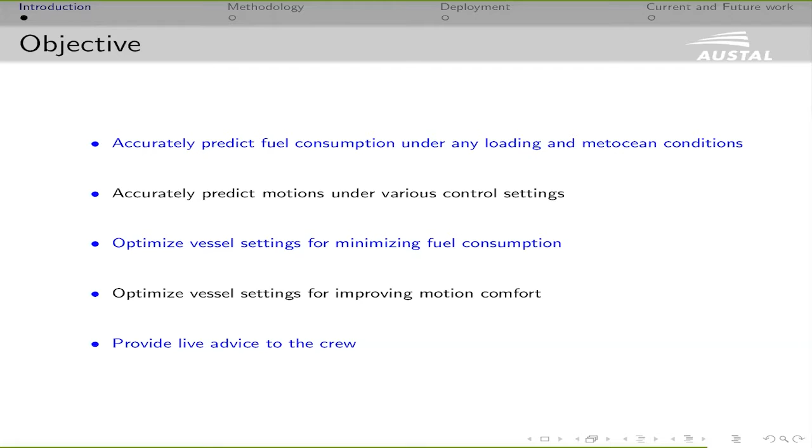The parts highlighted in blue are the ones that I'm going to talk about in this presentation, and the one in black is not a part of the current presentation. To give you a bit of overview of what we managed to achieve: we achieved a very good accuracy in our fuel prediction. We managed to do real-time prediction and optimizations.

By deploying our advisor system on a high-speed vessel, we managed to achieve up to 4.5% fuel consumption improvement, and also about 20% improvement in the motion comfort. We are also able to provide live advice to the crew on the distribution of the motion comfort and sickness across the passenger deck at any location. Again, the parts in blue are the ones I'm going to focus on in this presentation.

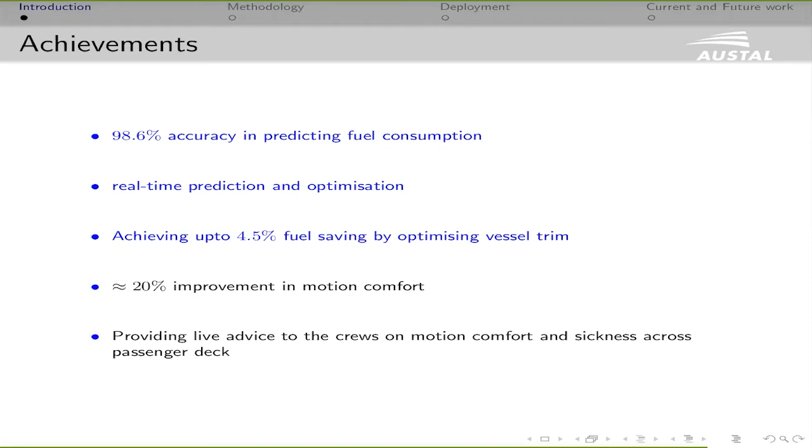The vessel that we deployed the model on, and that I'm going to show you as an example today, is called Bocayna Express. Bocayna Express is a 65-meter catamaran built by AUSTAL and operated by Fred Olsen Express in the Canary Islands. It has a length of about 65 meters and a displacement of about 650 tons. Generally during operation it has a speed of 28 knots.

We've been collecting data since August 2018 as a part of the Marine Smart project, for about 1,800 journeys. To analyze and build the models, we segmented each journey into 3-minute segments, and we use each of those 3 minutes as a row of data points in our models. This was because we wanted to understand the influence of variations like headings, speed and water depths.

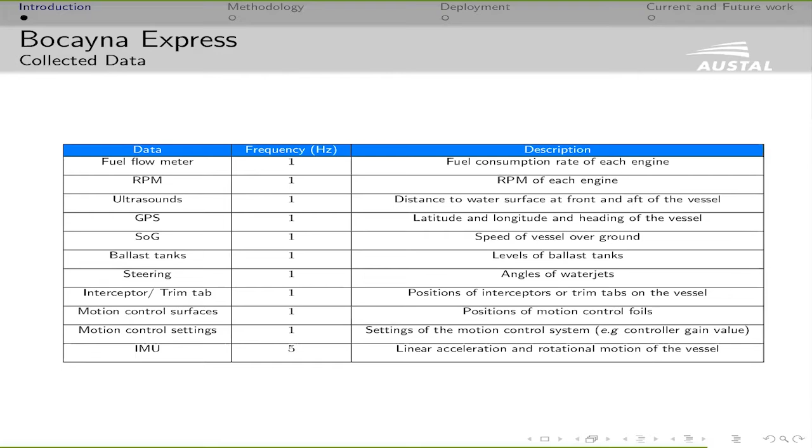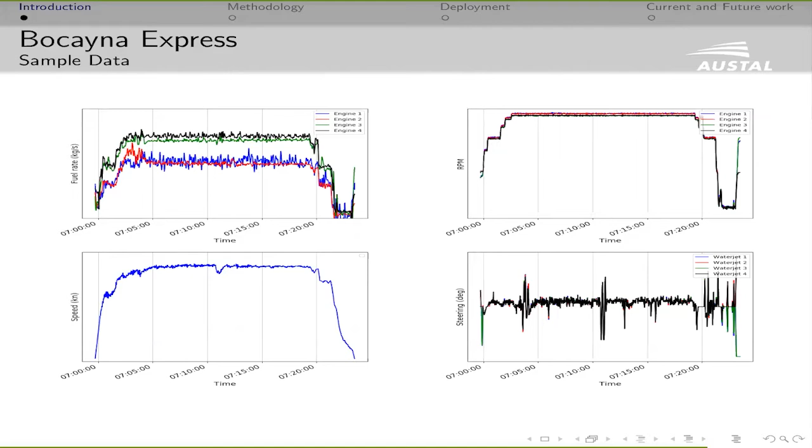To show just a bit of an idea, this shows some of the samples, for example, one particular journey that we collected the data for. On the left, you see the fuel flow meters on each of the engines, then on the top right, you see the RPM. Bottom left, you see speed over ground, and then on the bottom right, you see the steering angles.

So generally, I'm not a naval architect, I'm a mechanical engineer, but I learned from the naval architect that you calculate the fuel prediction using physics-based approaches. You rely on tank test data for your resistance, and you have your resistance as a function of your speed and water depths and different displacements, and maybe a couple of different trims.

And based on that, you know your resistance, and you also have your propulsion system with the water jet, for example, your thrust curves on top of that, so you understand what your thrust is, and then you can use the cube law to calculate the RPM and look at the engine performance curves to find the SFC, specific fuel consumption, and from that you calculate your fuel consumption. And this is essentially the physics-based approach, because you're relying on the known physical relationship between the parameters to calculate your fuel consumption.

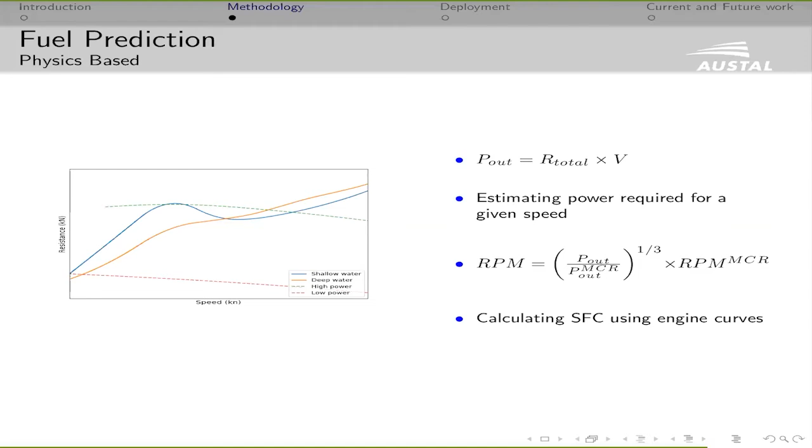Of course, the issue with this is that it really depends on how well you know your resistance and how many tank tests you have done. And also in reality, the conditions are different and the performance changes over time. And also, it doesn't take into account the other resistances, wave resistance or wind resistance. All of those parameters have been added as experimental values. But generally, these are the shortcomings of the method.

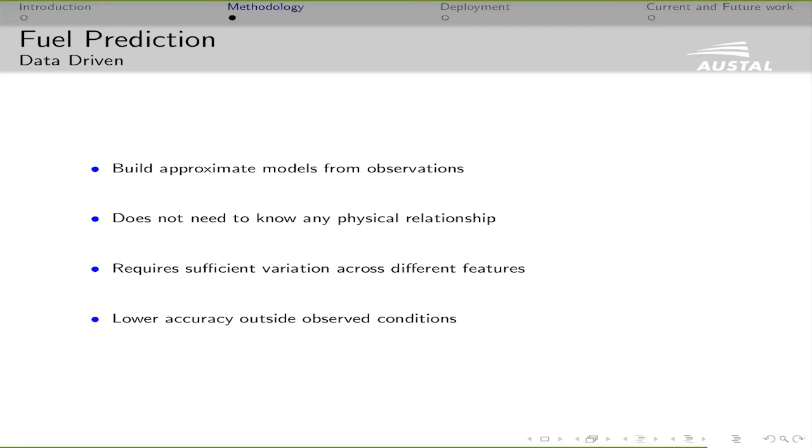In a completely different way, you can build models from data. So essentially, we build approximate models from the observations that we're making. We don't need to know any physical relationship, but it requires sufficient variation across different features. By features, we mean, for example, different trims, different displacements, different water depths, and so on. And the problem with these models is, again, the accuracy drops if we want to use them outside of the conditions that the model has been built on.

So our view was that we can combine these two approaches and come up with a hybrid approach, using the physics-driven approach and the completely data-driven approach together. In a nutshell, if we're building a relationship between the x vector and the y vector, x being our features and y being the labels, here the fuel consumption, what we want to do is add an extra feature to our model, which is the theoretical fuel consumption calculated from our white box model, the physics-based model.

There are different ways to build this type of hybrid model, but we decided to go with a naive approach: you just add a new feature to your data-driven model, and that new feature is your physics-based model. So from the measured data, we pass that into our physics-driven model. It calculates the theoretical fuel consumption, and then we bring that theoretical fuel consumption plus the measured data into our data-driven model, and we build a predictive model on top of that, which gives us a predicted fuel consumption.

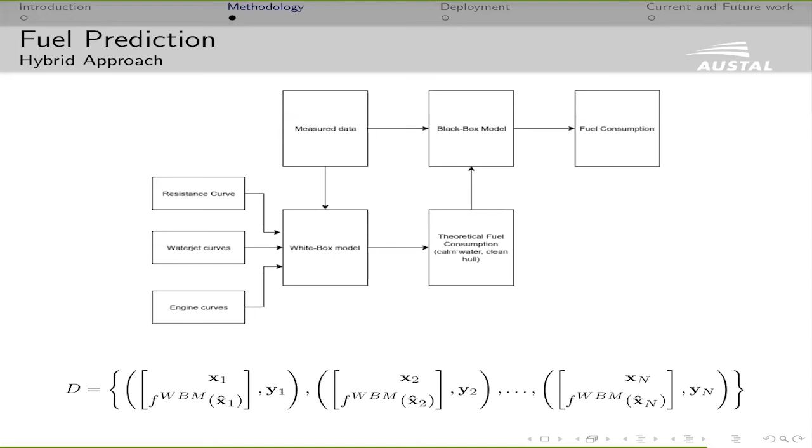The approaches that we're doing: because data-driven models are really dependent on the quality of the data, we spend a lot of time doing the data cleaning. If we have missing data, there are several approaches to deal with it, but we decided to just remove the data to make sure that it doesn't add any uncertainty into our models.

After that, we do a z-score calculation in each of our columns, and any data point with a z-score higher than 3, which means it has a distance of more than 3 standard deviations from the mean of the data distribution for that particular column, we remove. Then we also pass it through the isolation forest, which relies on random forests, for the final anomaly detection and removal.

Then we go to building the predictive models. We decompose the data into 80% and 20%, and we use 80% to build our predictive model and then test it on the 20%. That 20% is completely withheld from training to make sure the model has not seen any of that data. For each data point, we first calculate the theoretical fuel consumption, add that into our features, and then build the predictive model.

We tested many different predictive models, and we finally came to using the XGBoost model, which is based on gradient boosting, and we find that it gives us the most accurate results in the most efficient time. It is really important to do hyperparameter optimization, and we do a grid search across all the XGBoost hyperparameters to tune them to give us the best answers. And then finally, we test on our withheld test sets.

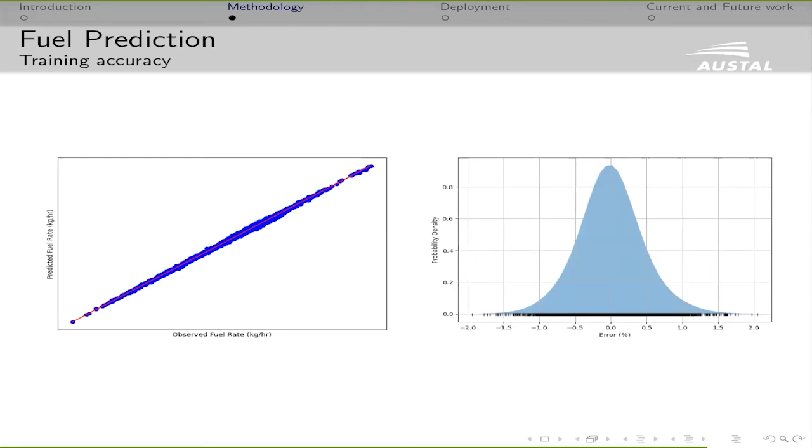The first step is to look at how well the model does on the training set. Our model on the training set has a standard deviation error of 0.5%, so very high accuracy, but that's the training set. The important thing is to look at the test set, where we have a standard deviation of 1.5%. This is a really good result, to be able to predict fuel consumption with such a level of accuracy on a data set that hasn't been seen by the model during training.

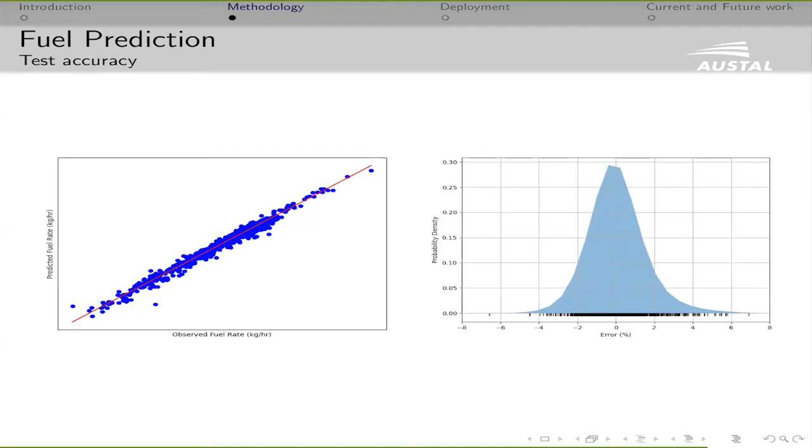Once we build the model, it's really important to look at the important features, how the model is learning the relationships, and which features have the most significant impact on the accuracy of the model. This is done by what we call the F-score, which shows how many times the decision trees use a particular feature to make a critical decision.

It's really interesting to see that the highest score is the theoretical fuel rate. So our hybrid model is really important, because by combining the theoretical fuel consumption, the white box approach, into the data-driven model, we can achieve very good accuracy in predicting fuel. We also have a very high score for water depth, which is interesting because, from the physical point of view, resistance is really influenced by water depth. So the model has understood the importance of water depth.

We see the importance of the environmental conditions, for example the relative wind direction, relative wave direction, and relative current direction. We look at the speed of the vessel, trim settings, displacement, RPM, static trim. These are really important because later you will see these are the parameters we optimize, and we try to minimize fuel consumption by optimizing them. If those parameters had no effect, we couldn't achieve anything. You also see the influence of the significant wave height, hst here.

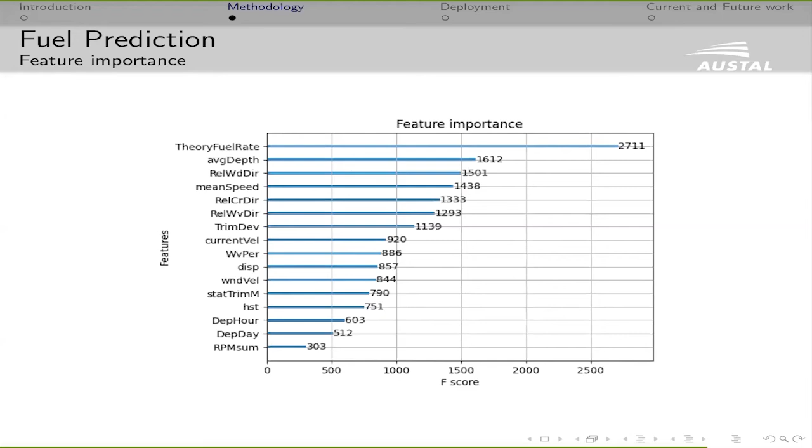So of course, building the predictive model is one step. At the end of the day, we want to deploy it into the system and optimize the vessel settings to minimize fuel consumption.

We deploy these models onto the vessels in real life and perform real-time predictions and optimizations. When the vessel is loaded, we measure the distance to the water from the sensors, the draft at the forward and aft of the vessel. From that, in real time, we calculate the vessel displacement and trim. The models also get continuously fed with the level of ballast in the ballast tanks, so we know how much ballast we have in the tanks.

We, on board of the vessel, at the pier, are actually making API calls to external sources and getting the metocean data. Then we feed everything into a genetic algorithm optimization loop, where we optimize the vessel trim, the interceptor positions, and also the displacement, all of them together, to minimize the fuel consumption, which is predicted for each of the chromosomes or individuals of the genetic algorithm in real time on the vessel by using the predictive model that we built.

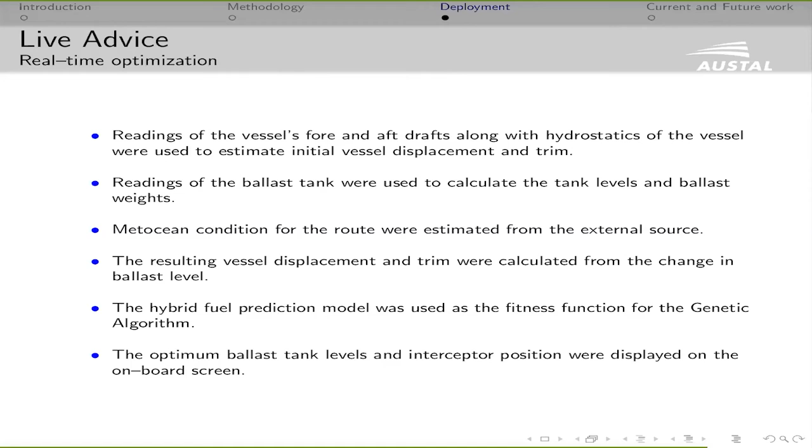So I hope that you see the video when I'm playing it. I hope that you're seeing it, so I assume that you do. Yes, yes, so we can.

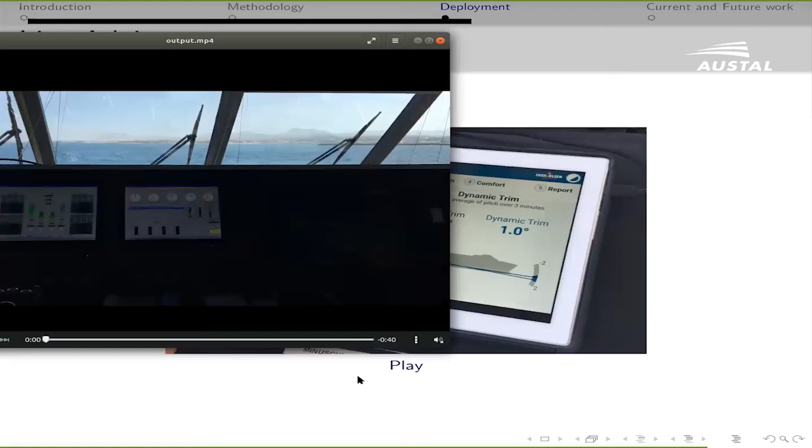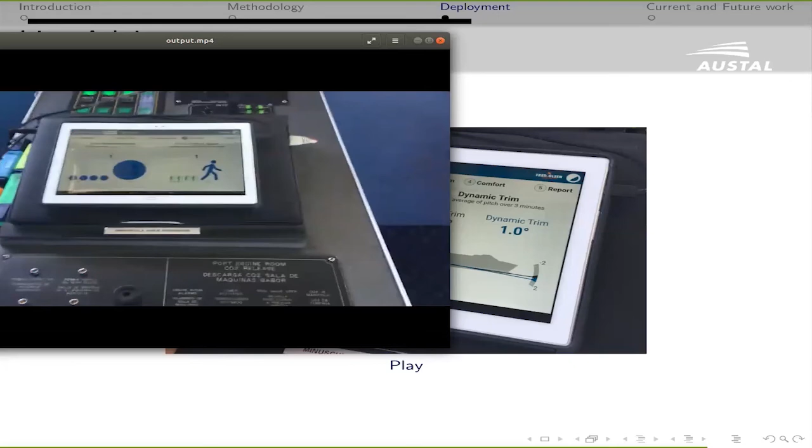So this tablet in front is where the system is actually running, and we're giving the advice in real time. We're feeding all the data, and you can see here, for example, the static trim in that part: the advice that has been calculated in real time versus the actual one. We're looking at the dynamic trim, the advice, and the actual one. We see that the crew here have been following that.

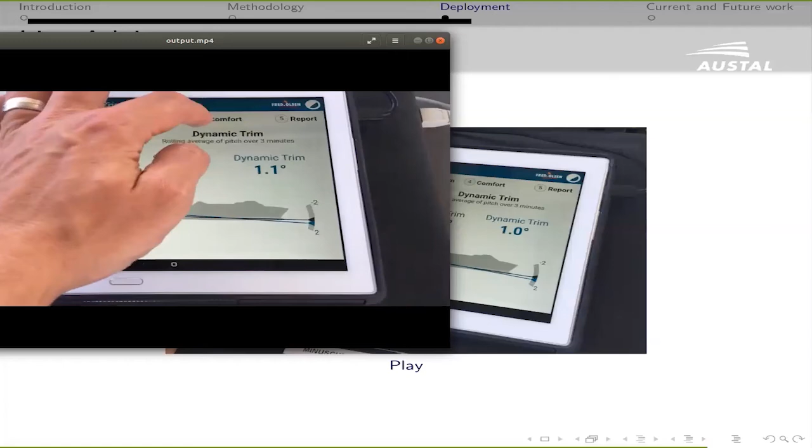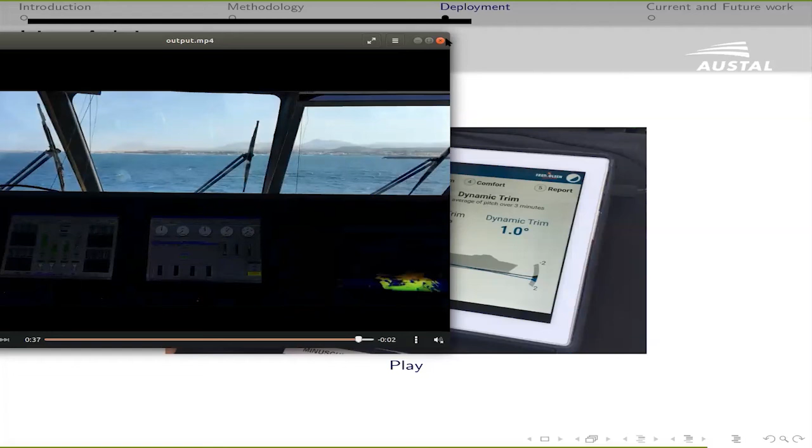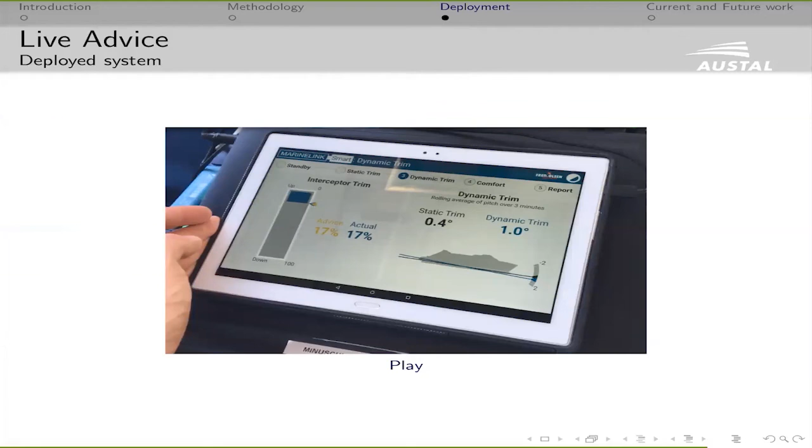And this is also the comfort screen, where we're calculating in real time the passenger comfort and sickness level as a single number. So this is the system that has been deployed, and it does the prediction and the optimization in real time and provides advice on what should be the optimum ballast tanks and the optimum interceptor positions.

Then we wanted to understand how well it was actually working in reality. So we looked at the conditions when they were running the vessels, and we looked at the time when no advice had been provided to the crew as the control condition, and the time that we provided the advice for the interceptor, the time that we provided the advice for the ballast tanks, and the time that we provided the advice for both of them.